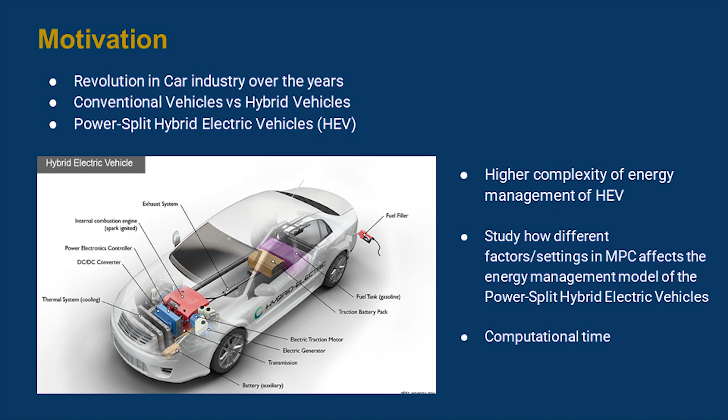Hello, my name is Rashawn Childers. I'll be going over the motivation for our project and the type of system we decided to study. Over the last few decades, we've seen a revolution in the auto industry with the rise of electric and hybrid electric vehicles. There's been steep competition between conventional vehicles and hybrid electric vehicles, with hybrid electric being the most efficient of the three. In our project, we decided to look at a power split hybrid electric vehicle configuration. With this higher efficiency also comes higher complexity and energy management. So we decided to study how different settings in MPC affect the energy management of the model.

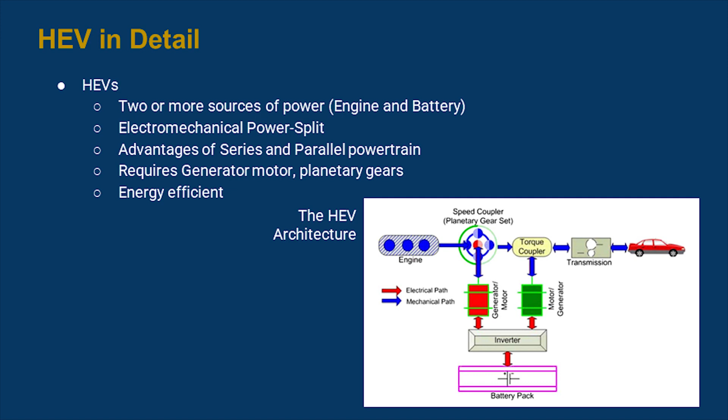Here you can see a figure of our power split system. It consists of two energy sources being the engine and battery. Here you can see there's an electrical mechanical power split with the engine sending mechanical energy to the planetary gear set, which sends mechanical energy to the torque coupler, and both of which can send and receive mechanical energy to the generators and motors, which convert the mechanical energy into electrical energy, which is stored in the battery. This is efficient because we are storing wasted energy from braking, which would otherwise be dissipated into the atmosphere.

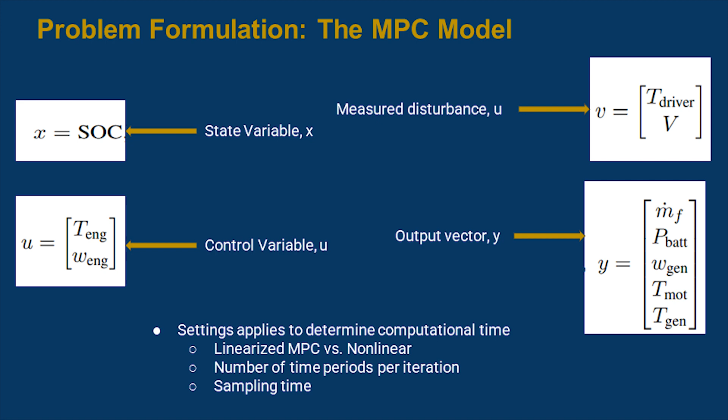My name is Pustilnik Mark. On slide 7, we can see the mathematical problem formulation for the MPC optimization. So the cost function tries to minimize the amount of fuel used, meaning minimize the use of the petrol engine, and bring the state of charge of the battery to some reference value. The formulation on the left is the full dynamics formulation of the problem, and it includes the dynamics of the electrical motor and the petrol engine. And on the right is the same formulation but reduced to hold only the decision variables of the MPC.

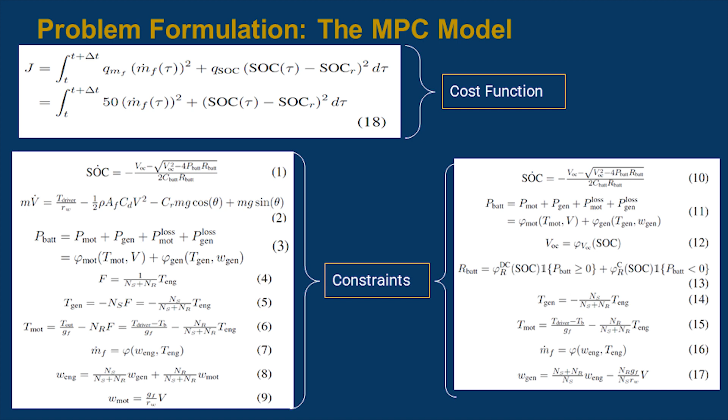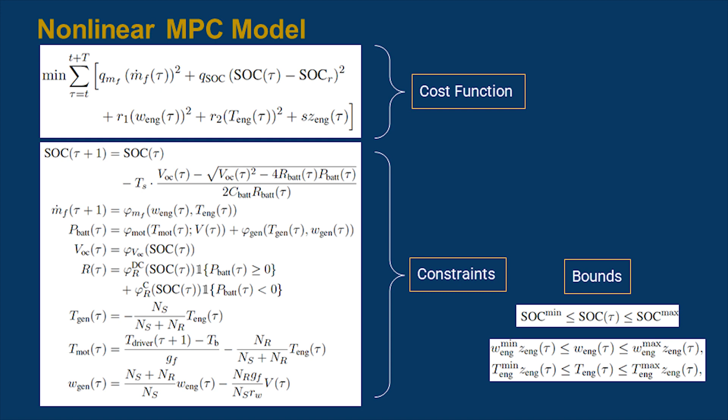Hi, I'm Jisun and I will briefly go over the MPC model we used and the simulation results for the nonlinear MPC model. In the nonlinear MPC model, we iteratively solve an T-period energy management problem given as follows. Additional to the cost function given in Borhan's paper, we added quadratic cost of the speed and torque of the engine and a fixed cost S that occurs whenever the engine is on. A binary variable z engine is also defined to assign 0 to the speed and torque of the engine when it is off, and also account the fixed cost of the engine turned on.

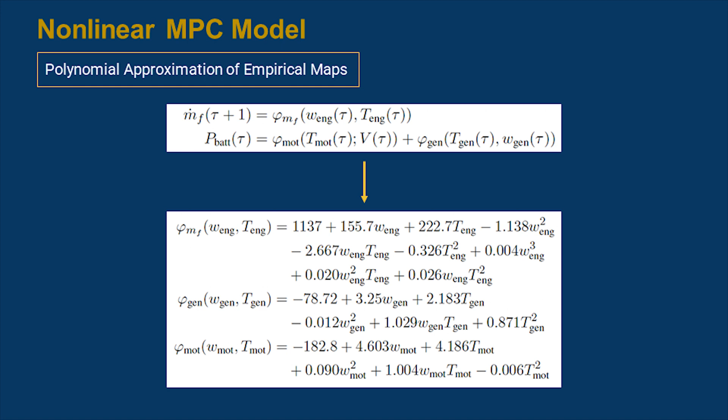As the Gurobi solver we used, and also most of the commercial solvers, cannot formulate interpolation constraints of more than one variable, we approximate 3 empirical maps with 2 decision variables with polynomial functions. Then for the linear MPC, we first reduced the problem dimension by projecting out some auxiliary variables and linearized the simplified formulation using partial derivatives.

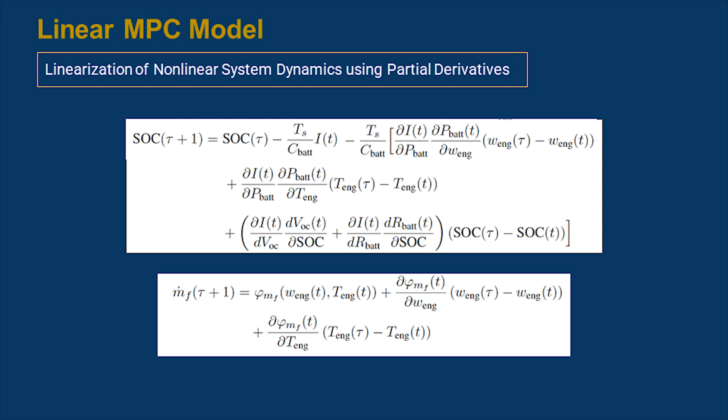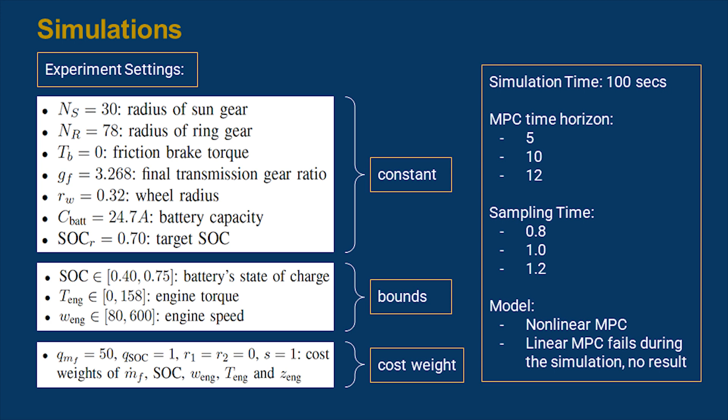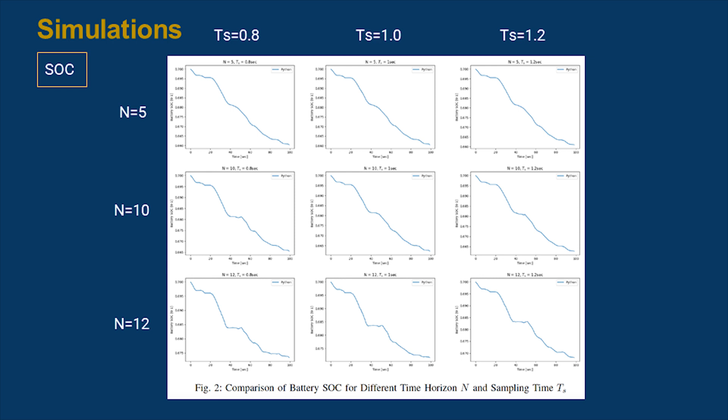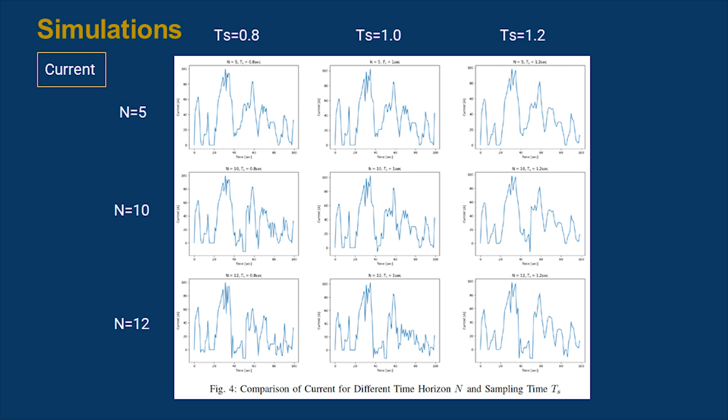Comparing the computational time, it reduces as n decreases, which is obvious, and also decreases as the sampling time increases. The final SOC is almost the same for all instances as we have seen in the graph. However, the total cost and the average fuel rate also increase as n increases, which is not what we expected, as when the time horizon we consider in each period increases, we expect that it would do better control with less cost.

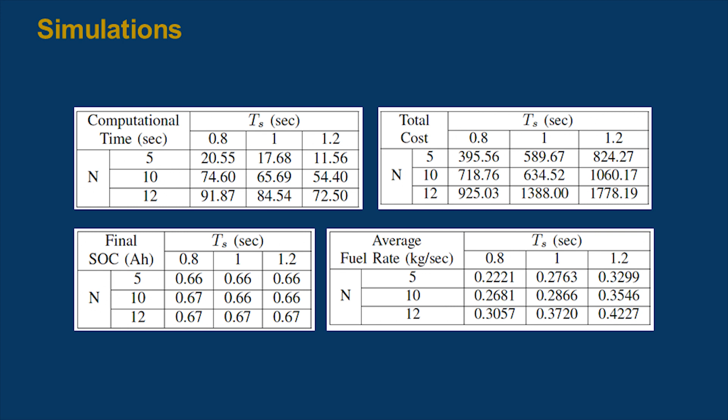To conclude our presentation, we were able to formulate the energy management of the power split hybrid vehicle and run simulation with different time horizons and sampling times by using two types of models: the nonlinear MPC with discretization and polynomial approximation, and the linear MPC model using the gradient approach.

However, the performance of our model depends highly on the data in order to give us accurate results. Besides, the linear MPC model couldn't reach the desired output for the simulation time horizon of 100 seconds. And finally, we obtained some unexpected results for the nonlinear model that needed additional work to analyze.